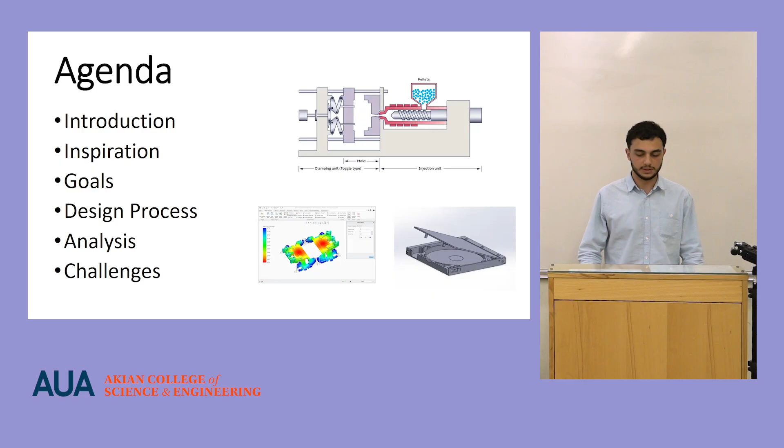So let's quickly look at the agenda of today's presentation. Firstly, I will introduce the molding process overall to give you a starting picture of the molding process. Then I will talk about the inspirations, the goals I have for this design and analysis, the actual design process, the analysis, the results of the analysis, and the challenges I've met.

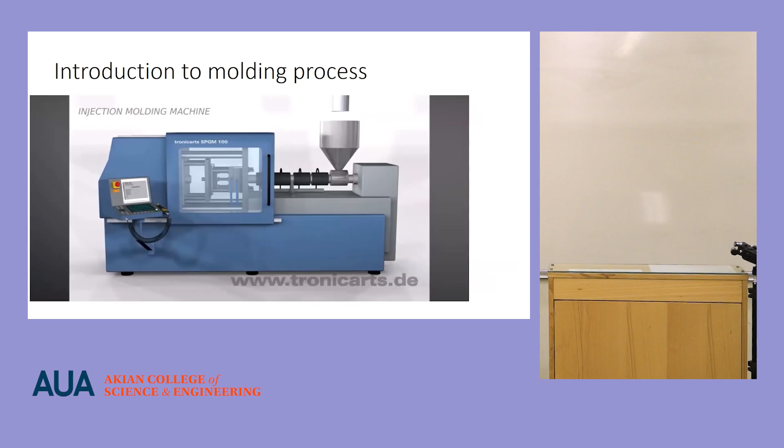So let's look at this video, and I will show you a small injection molded part, which after the blow will become a small bottle, a 0.5 liter bottle. So, sorry.

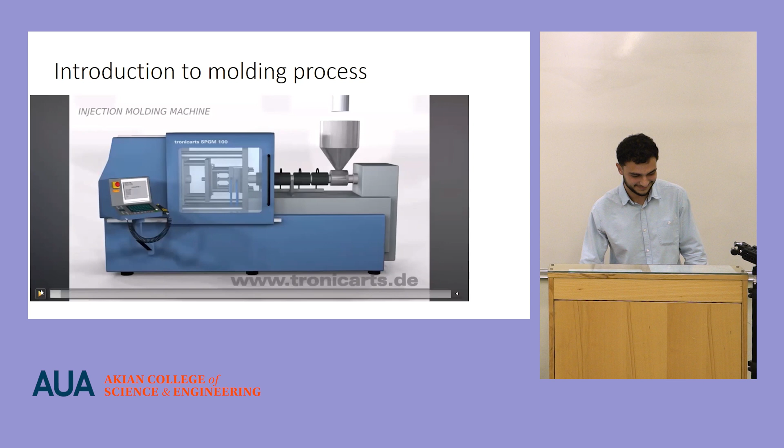So the first part of injection molding. The first starting part of the injection molding was filling the granules, the plastic granules. Then, with the help of these heating elements, these plastic granules were melted.

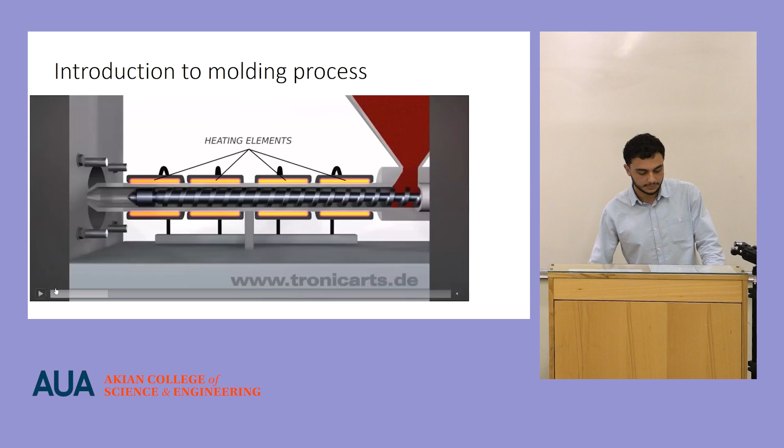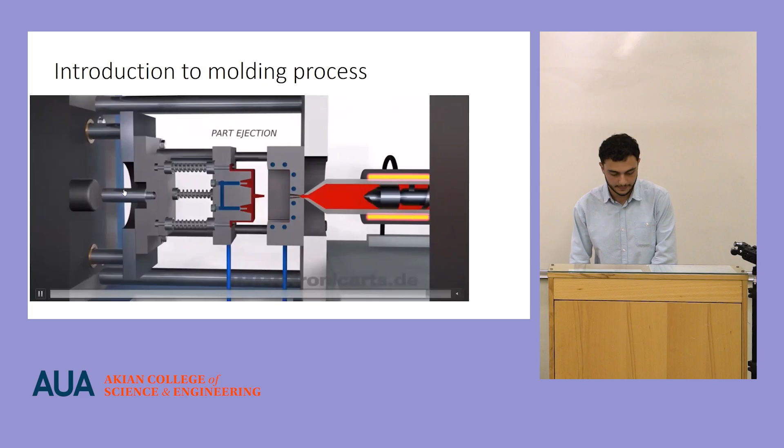After getting melted, with this shaft, with the screw and the non-return valve, they are injected into the part where the final part will be molded. Then ejected. And this whole process is done repeatedly to create these kinds of molded parts.

The design engineers are creating the PCBs, and when they need to assemble all these designed parts, they need to find the corresponding parts. So with the help of this box, they can easily find their components in the warehouse, and this box is connected to software which traces the corresponding parts. It is actually out of my scope; I've worked purely with the mechanical part of the project.

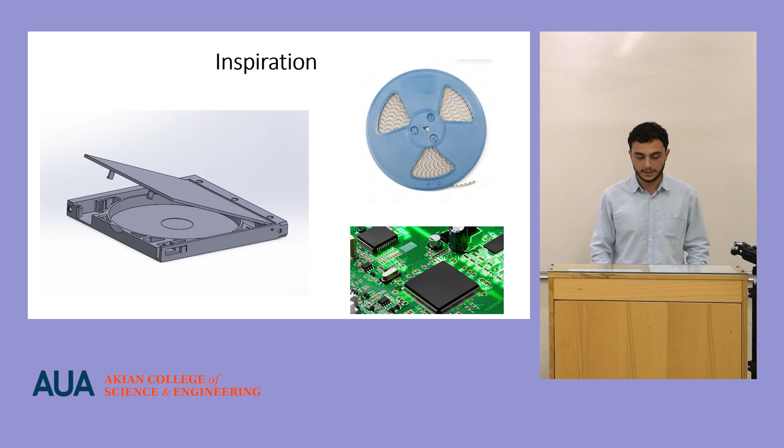So I think the most important part of the collaboration with the company is to meet the goals they have set from the start. I've mentioned here 4 main goals: scale production, to increase the manufacturing capacity and to meet higher demand more efficiently; to reduce the unit costs, because we all know that 3D printing is very time consuming in comparison with molding, and also expensive.

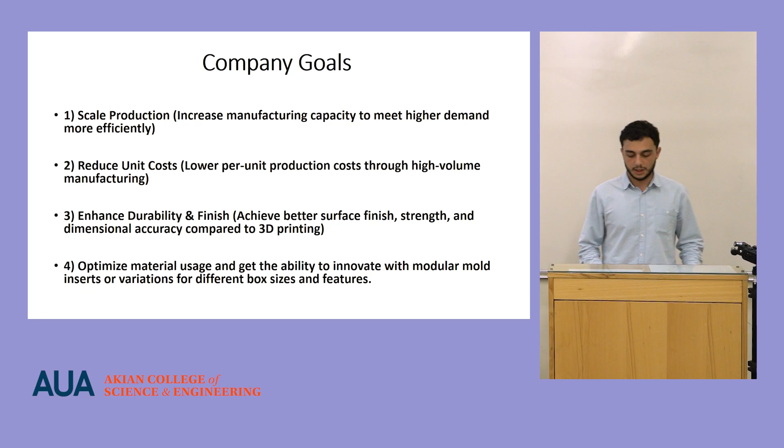Also, they want to enhance the durability and the finish of their models, which we cannot do with 3D printers as well as we can with injection molding, and to optimize material usage and be able to change some features, the shapes, the design of the parts easily with some inserts on the mold.

The first part of the analysis is material selection. This is very crucial for the project because we need something which is very durable, easy to be molded, easy to be melted, and to be shaped in the mold I've created.

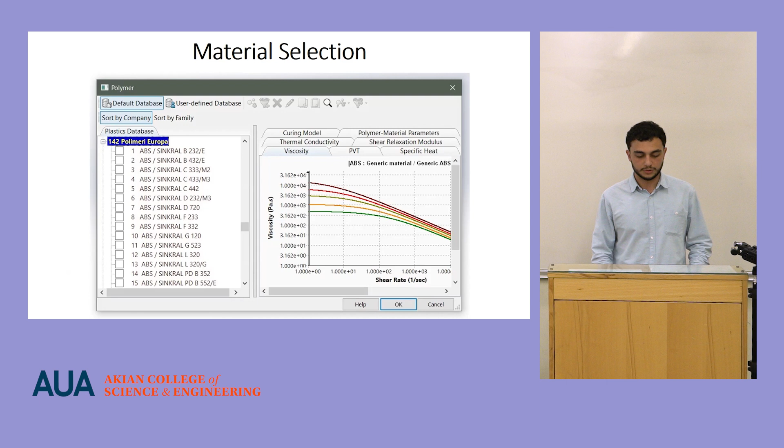So, with the help of this company, their engineers, and also my research, we have chosen to use ABS as the main material for our molding, because it is very durable in some prototype tries. They concluded that ABS has good durability and surface finish. So we tried to create the mold to use with ABS plastic.

The next analysis part is the fill analysis, which is dedicated to understanding how the filling process was done. This analysis was done with the software called SolidWorks, and after some slides, I will show you the defects which we can get from not doing this analysis.

And in the result, we see that the filling time is approximately 2 seconds. As you can imagine, the process of 3D printing this part actually takes 4 to 6 hours for medium quality.

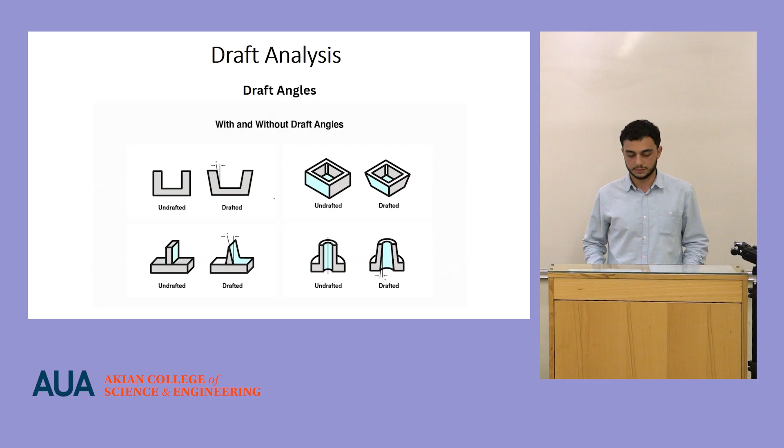So the next phase is draft analysis. Here you can see with these pictures that some models need to be drafted. An angle must be given to the surface because, for the standard molding process, for the ejection process, we need to give some angle to the surfaces, because we will not be able to just pull the model out of the form if we do not do the draft analysis and do not give angles to the surfaces.

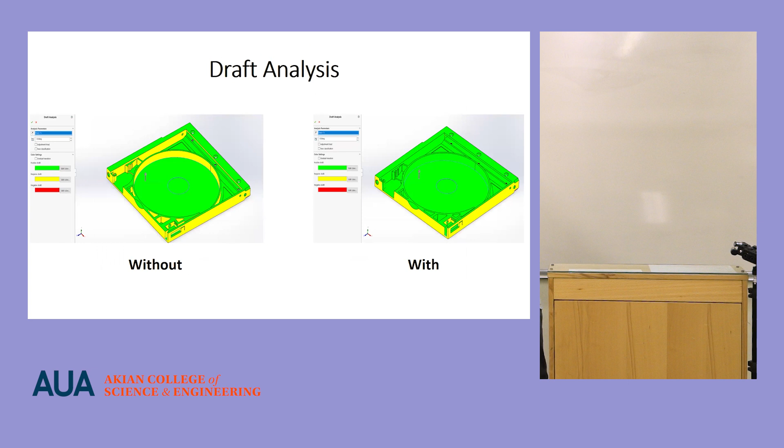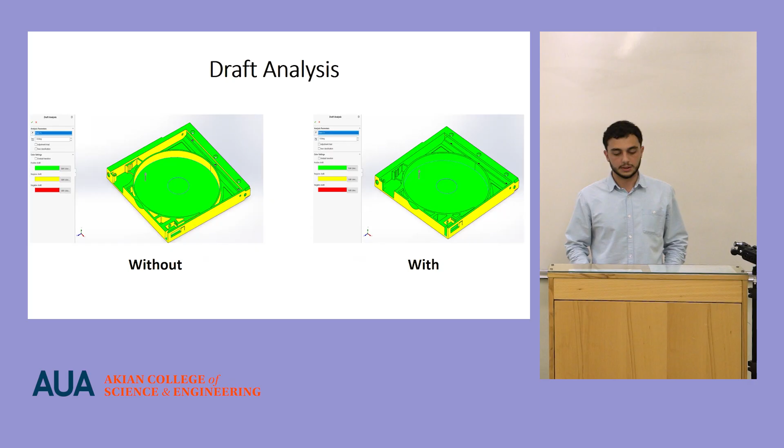So here you can see the draft analysis with and without drafted angles. I've tried to design the upper part, this part of the mold. On the left picture, the yellow ones are not drafted. On the right one, they're drafted, and as you can see, it is given 1.5 degree of draft angle. It is also very specific for different projects, for different models, and it is connected with their specific designs.

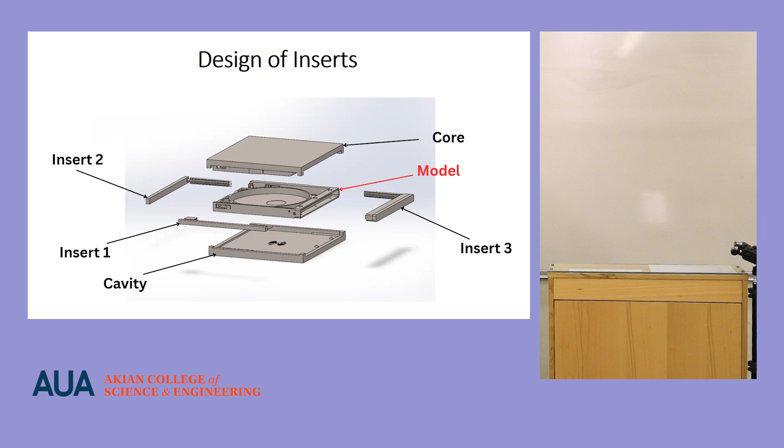Also, part of the design is the modeling of the inserts. As my model is not quite an easy one, I need to design some inserts for this model. So in total, I have 3 inserts, and two main parts, the core and cavity.

I want to show you the results that I've got after the analysis. As we want to get a scale production, we can compare 3D printing and injection molding. As I've said, for standard quality, we need to spend 4 to 6 hours to print this part. But with injection molding, we can do that in a maximum of 40 seconds.

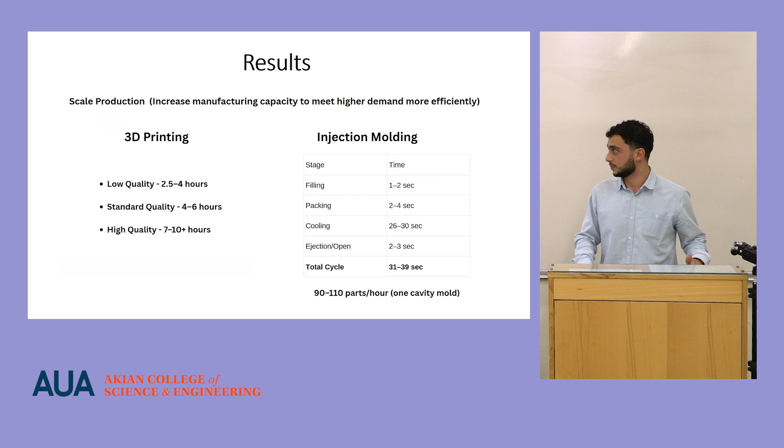And in the case of multi-cavity molds, we can do that much faster. Also, I want to mention that I got a good result for the reduced unit cost. For 3D printing, the cost of one unit varies from $3.5 to $5.5. And in the case of injection molding, the molded part will cost $0.9 to $1.7.

Lastly, I want to discuss the challenges that I've met. Here is only the main one. Actually, the challenges are quite a lot, but here is only one challenge, the main challenge that I've met, and it was the redesign of the prototypes.

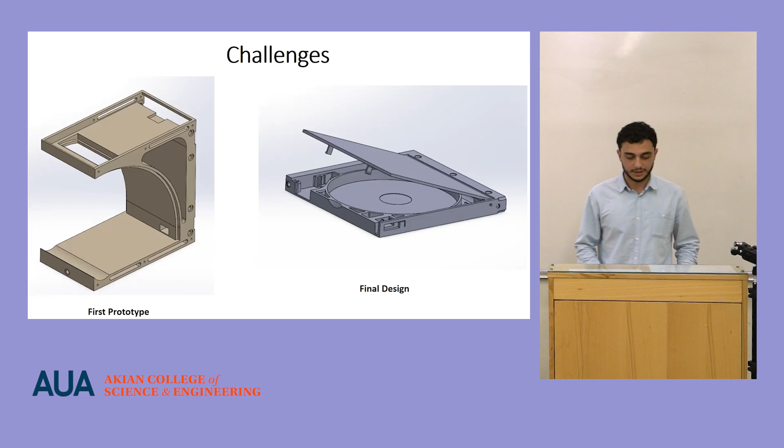As you can see, the first prototype is completely different, and it doesn't look like the last one and the final design that we have now. So it is very challenging to repeat the same cycle. As I've already mentioned: material selection, defining injection point, the fill analysis, draft analysis, and design of the inserts.

That's all. Thank you, everyone, for your attention.

Question: You said that it can't be 90 degrees or it won't come out of the mold. Did I understand that correctly? So it sort of drops — is that how it comes out? In the case it will give a 90-degree angle, we have two scenarios. The first scenario, we will get one of these defects, and the worst scenario is that we will not be able to pull the model out of the form.

Can you go to the next slide before the thank you? Can you go to that slide? This one? Yeah. These challenges — which one did you actually concentrate on in your work? I think the draft angles, because I can show you on the model.

As you can see, there are many directions that I need to draft, that I need to create angles, drafted angles. So I think it is the most challenging part to calculate it effectively and design it somehow to get a final version of the model according to the needs of the company, and at the same time to be able to connect these angles with each other.

You mentioned in passing that this is a pretty tough problem because there are a lot of things that affect how we actually inject and where we inject the material. Yeah, so this is a very highly non-Newtonian kind of flow. It is not a typical type of flow that you have when you're actually molding, when you're putting the material into your mold to create your part.

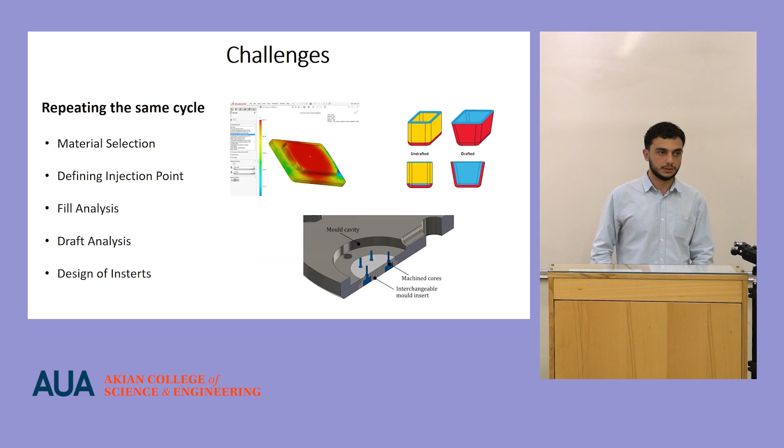My question is, did you do any analysis, like a fill analysis? Did you actually take a look at what some of the issues can be? Because the viscosity of the material you're using is highly dependent on the shear it feels, the temperature, the cooling, and so on. So where it goes and how it goes depends on all of that, and of course the injection pressure. Did you do any back of the envelope analysis for that, or did you just concentrate on these angles? No, of course I did.

As I've mentioned, I did the fill analysis, and I did the analysis of defining the injection point. As you mentioned, it's very important to define where to set the injection point, because if I set it in a different place, the flow could be completely different, and the temperature and pressure also act on this process.

So yeah, this was done in SolidWorks? Yeah, was this the CFD module inside SolidWorks that did this? There is a plastics module called plastics analysis. So I've used this software to do it.

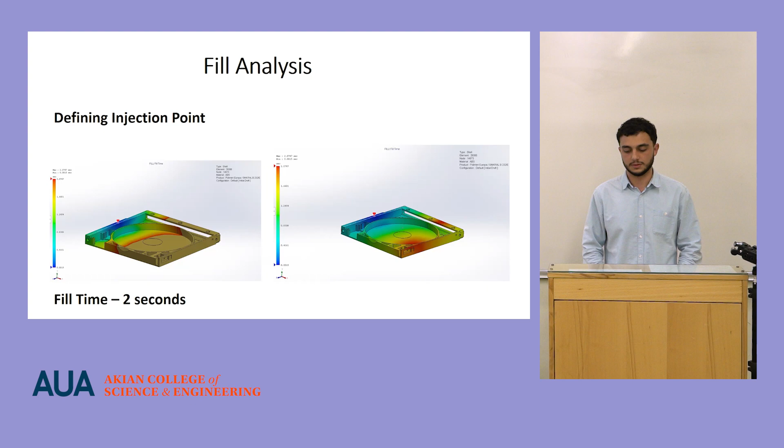If I could ask more, when you make, let's say, 89 degrees, the other angle could be 91, or it can't be more than 90. So if you want to have this nice and straight, how do you do it? Are none of these plastic parts really 90 degrees, or are they close? No, most of the angles are not 90 degrees.

Only the outer angles, because this distance is not too much, and the ejection process and opening process can be done with this kind of distance. But if we work with bigger projects, bigger components and bigger models, we will also need to draft these angles. The inner angles are drafted.

They're not 90-degree angles. Is that because it's not sticking, because it doesn't stick to the outside? Yeah. Oh, okay.

Questions? When was this invented? This was not invented yet... the molding, you mean, injection molding? I assume maybe during the 20th century, because we had a site visit with my supervisor, and I've seen a lot of machinery, old machinery, which are 50, 60 years old. So I assume maybe 20th century, yeah.

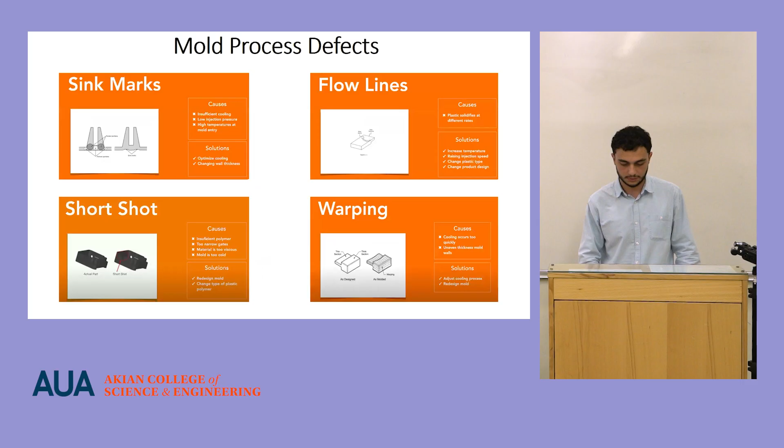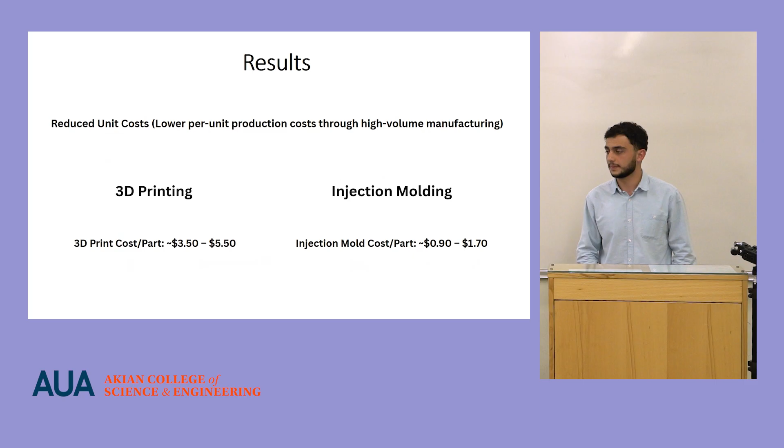So maybe $50,000 to $60,000.